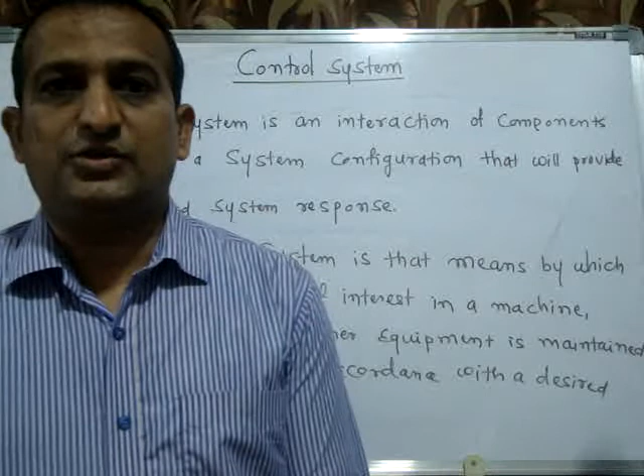First we'll see the definition of control system. A control system is an interaction of components forming a system configuration that will provide a desired system response. Here, the desired system response is nothing but output. So whenever a system gives as per our desired or controlled output, that is called a control system.

Some systems are there, you give some input, you will get that output, but it may not be a controlled or your desired output, then it is not a control system.

One more definition of control system: the control system is the means by which any quantity of interest in a machine, mechanism or other equipment is maintained or altered in accordance with the desired manner. Control system is not only controlling itself, sometimes it has to control other machines also.

A good example is a teacher. He has to control himself - he should be disciplined, go to class in time, prepare well, follow the timetable, and leave the class at the proper time. Parallelly, he has to control the class, control the students' discipline, check whether students are understanding or not, and maintain some specific speed - in 1 hour he has to cover some content. So the classroom with the teacher is also a good control system.

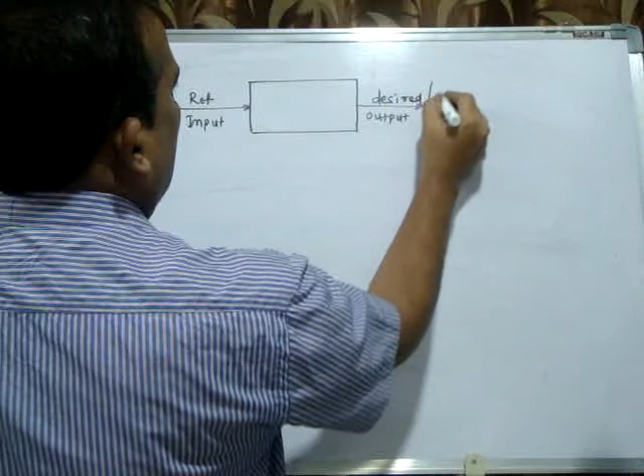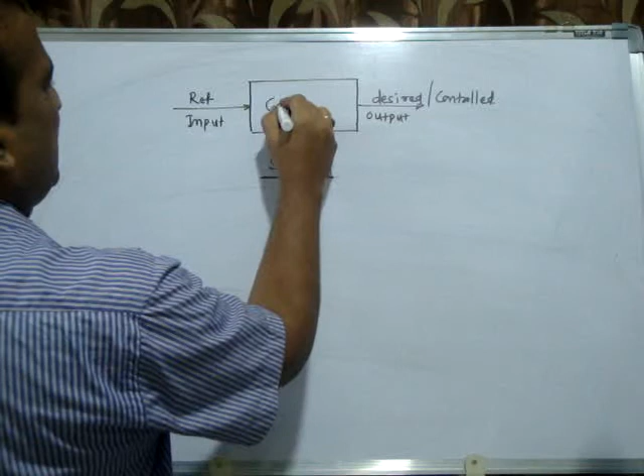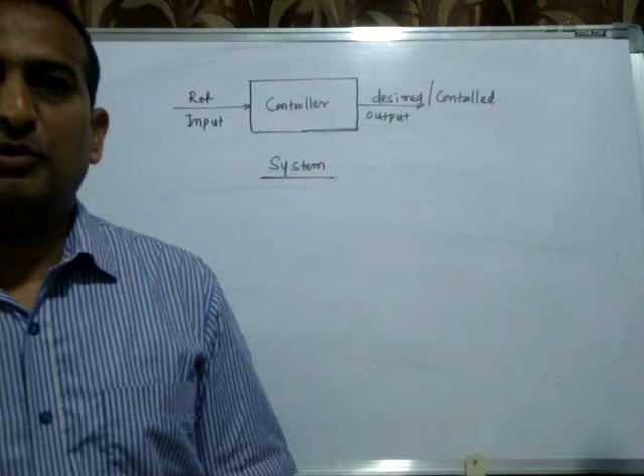Say for example this is a system. Here some controller, some controlling element is there. It may be a microcontroller, or it may be a microprocessor, it may be a PLC, or if it's a human body, then it may be the brain. So some controller is there - the controller is taking input and as well as it is giving the output.

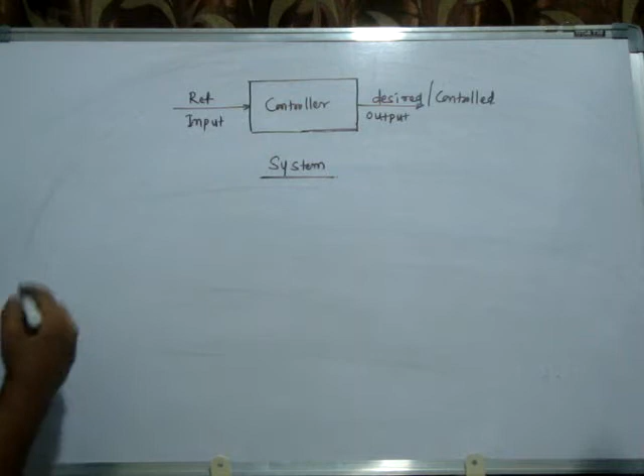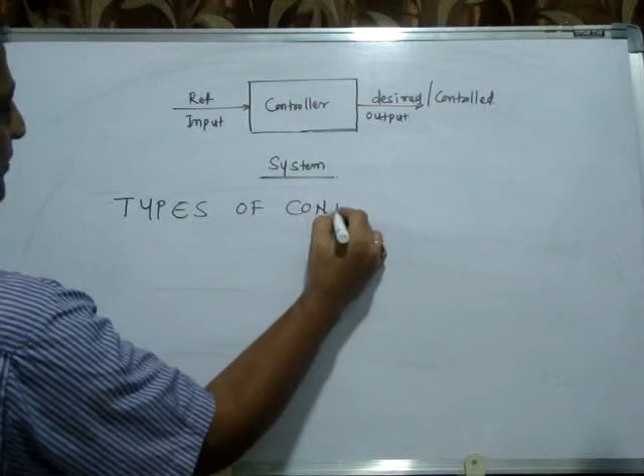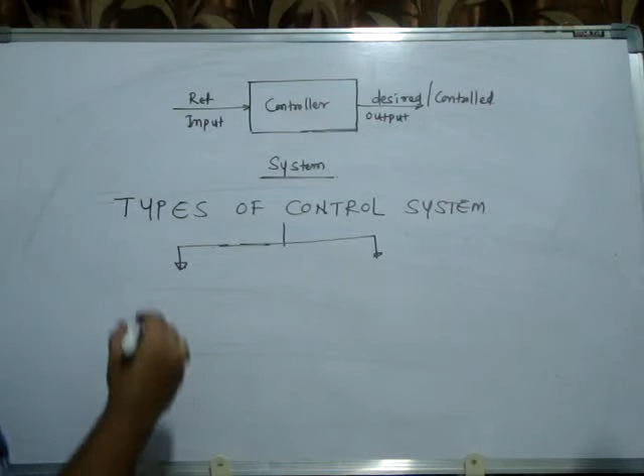Now I'll discuss the types of control system. Basically there are two types, though classifications differ across books. Basically there are two types of system: one is called open loop control system, and one more is called closed loop control system.

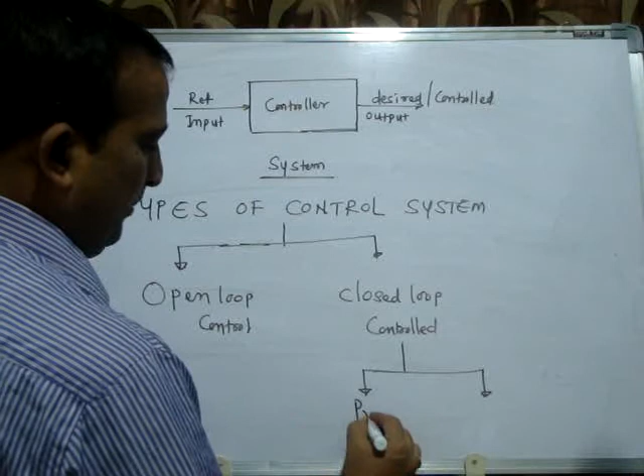If you refer to different books, there is a different classification, but basically it's open loop control system and closed loop control system. In a closed loop control system, I'll divide it into two: process control system, and one more is called servo control system.

We'll see the classification - man-made and adaptive control system, manual control, automatic controls. But the basic classification is open loop control system and closed loop control system. In a closed loop control system, process control and servo control. Let us see what is meant by open loop control system and closed loop control system, with some examples, and what is meant by process control and servo control system, with some examples.

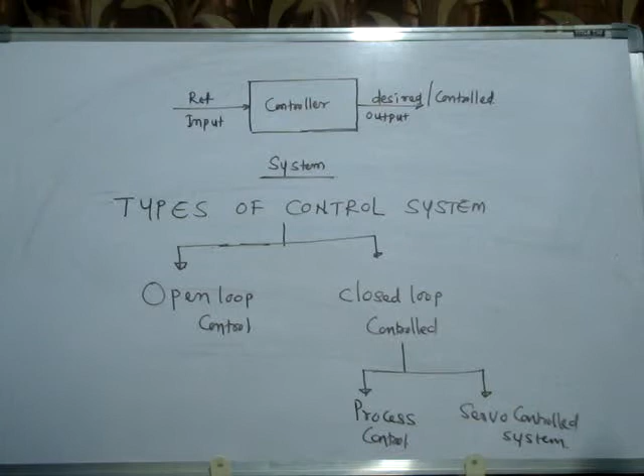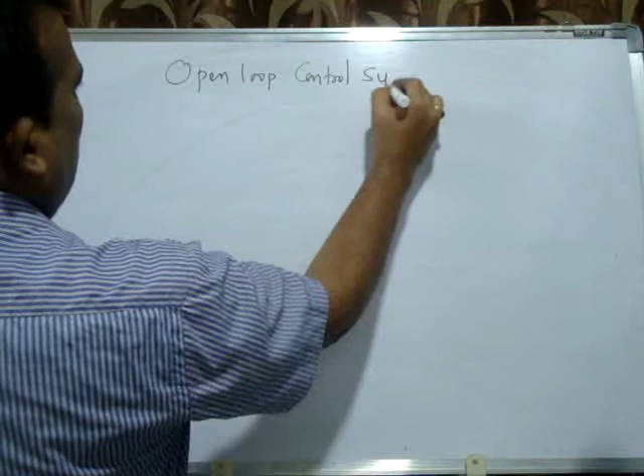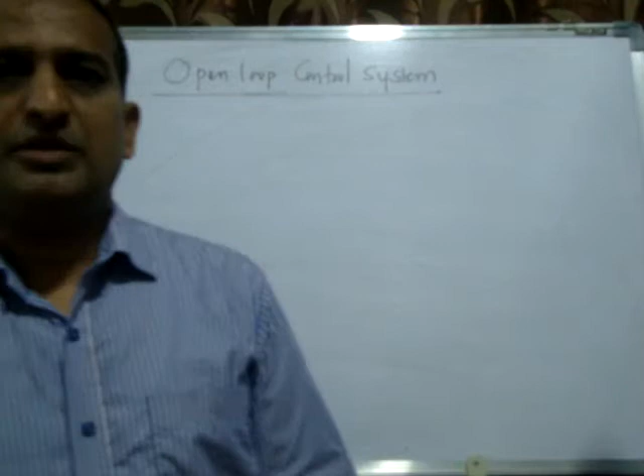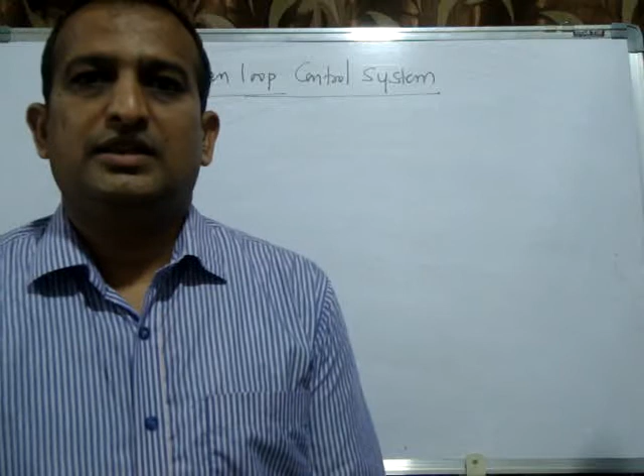First, we'll see the open loop control system. The good example for open loop control system is a washing machine. Many systems are open loop control systems. Even a teacher taking a class, not bothering about how many students are attentive, how many are writing notes, how many are understanding - he just teaches for 1 hour and shares the knowledge, but if he is not measuring how effective it is, then it is an open loop control system. In an open loop control system, the system is working fine and accurate, but we are not measuring the output.

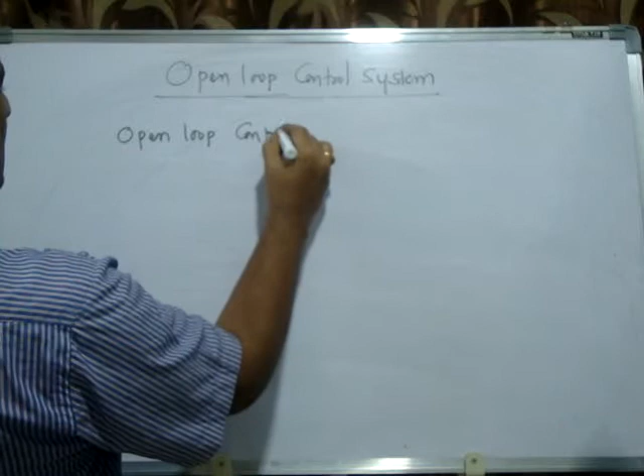So indirectly, how to define it? Open loop control systems are working on a time basis.

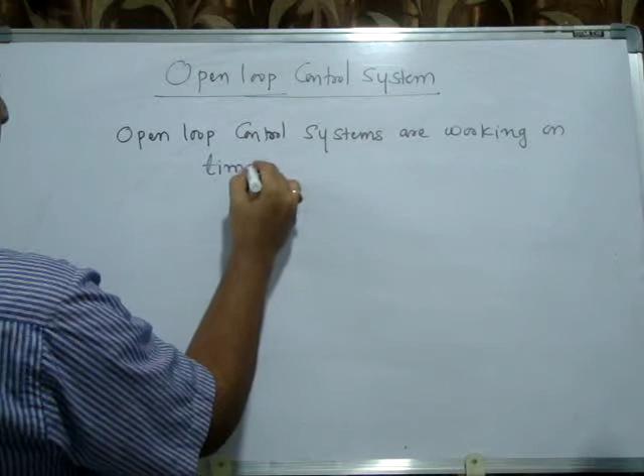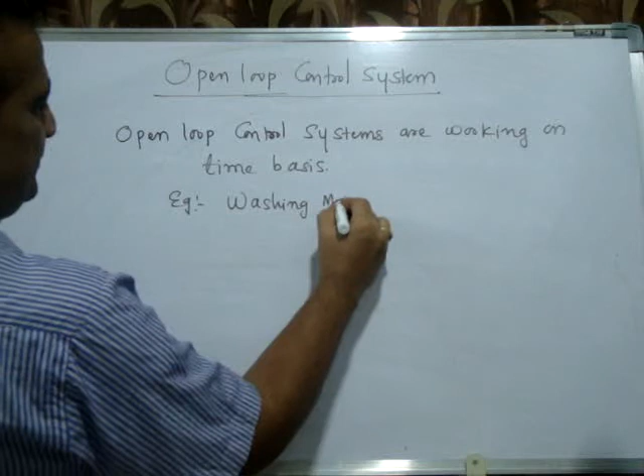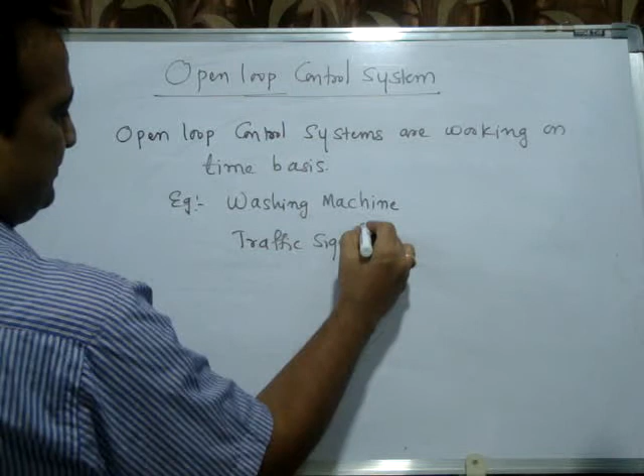You set the time, even the traffic control signal. A good example first is the washing machine, and the second one is what? Traffic signal. Many examples are there. Even you take a fan,

you just switch on the fan, it starts rotating, but at what RPM it is rotating, we are not measuring. Why is the washing machine called an open loop control system? Because the washing machine is not measuring the number of dust particles in the cloth. If you set 1 hour, it will work for 1 hour. If you set half an hour, it will work for half an hour.

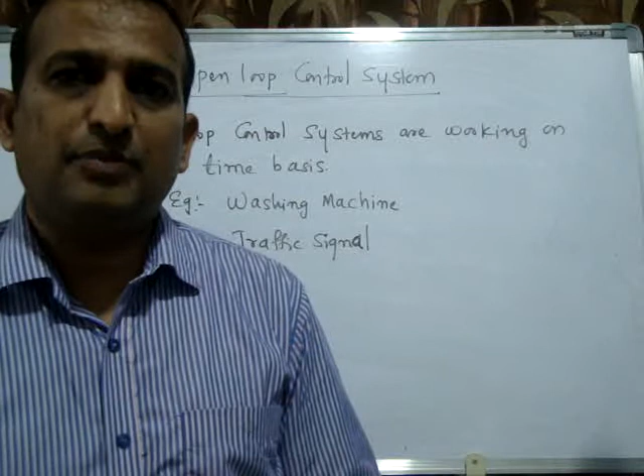But in America, and in India also, there are more advanced, costlier machines called fuzzy based washing machines. Up to a certain extent, as soon as you put in a cloth, it will measure and tell you this much washing powder is required, this much time is required. It measures the number of dust particles up to a certain extent. So that is called a closed loop control system.

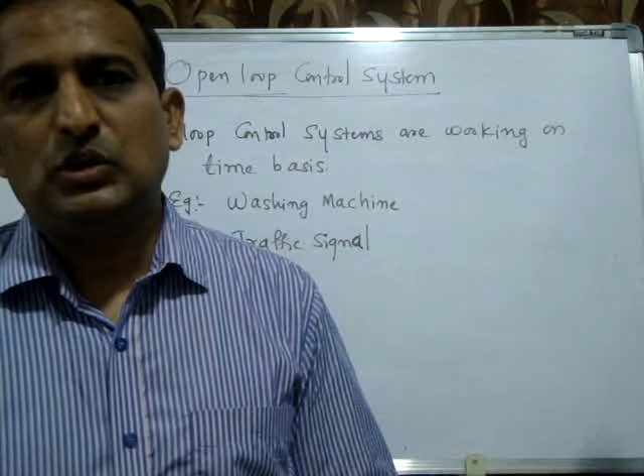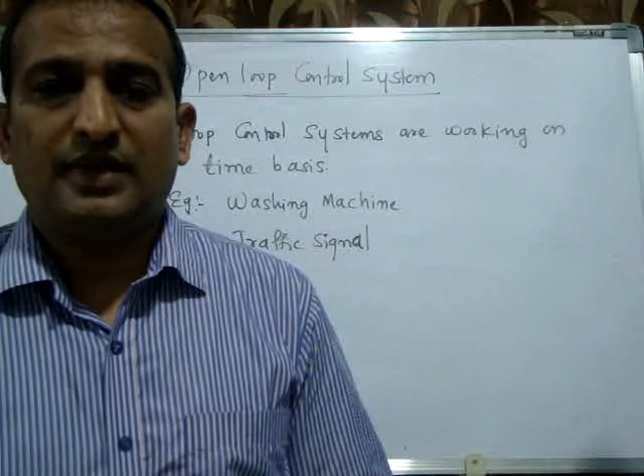But normally, whatever household machine we purchase, we set the time. Even if it is a new cloth, or the cloth is very dirty, we put 20 minutes, 40 minutes. You will get output, some cleanness, but not 100% cleanness. It is not called a desired or controlled output. Accuracy may be 90% or 80%.

In the traffic signal also, you set the time for the green light, red light and yellow light. Even if one side has no traffic, we still have to wait on the road. But in foreign and developed countries, they have put springs inside the road. They are called sensors, and these sensors measure the traffic density. As per density, they change the time automatically, not always constant.

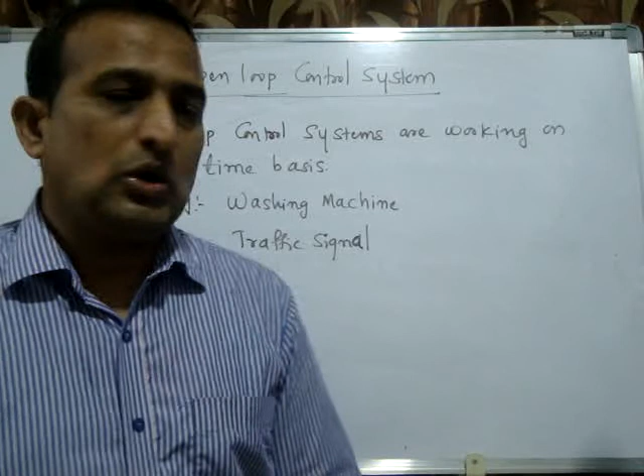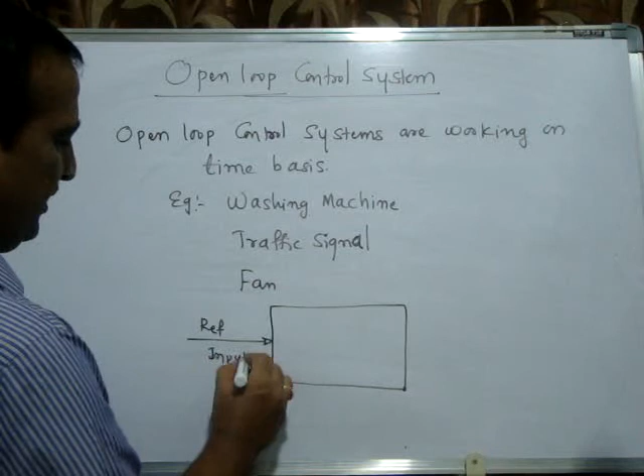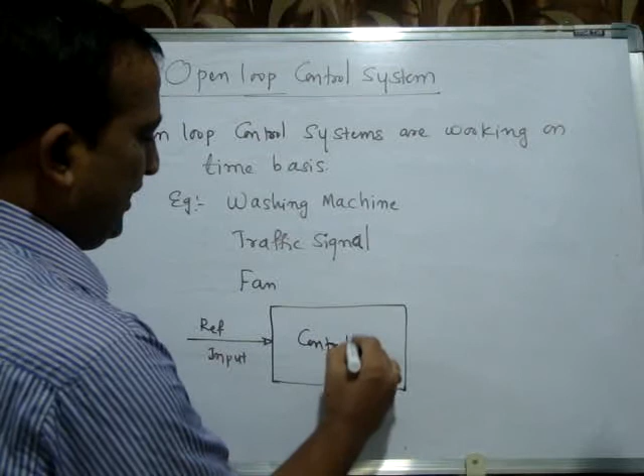So this is called an open loop control system. Here there is a reference input. Even for a fan, we'll put it at the first mark or second mark, or in the washing machine, we'll set the time. That is called reference input. And there is some controller. Already I have discussed the controller: microcontroller, PIC controller, PLC controller, and nowadays Arduino, Raspberry Pi. So many controllers are available.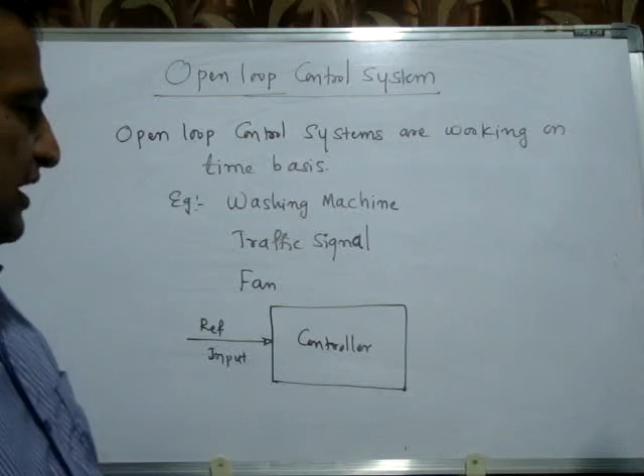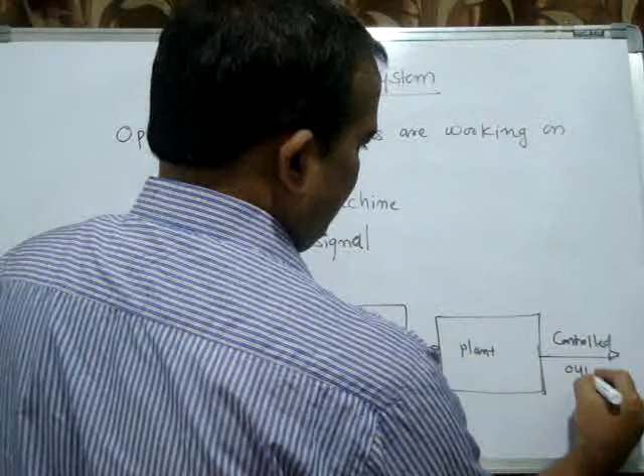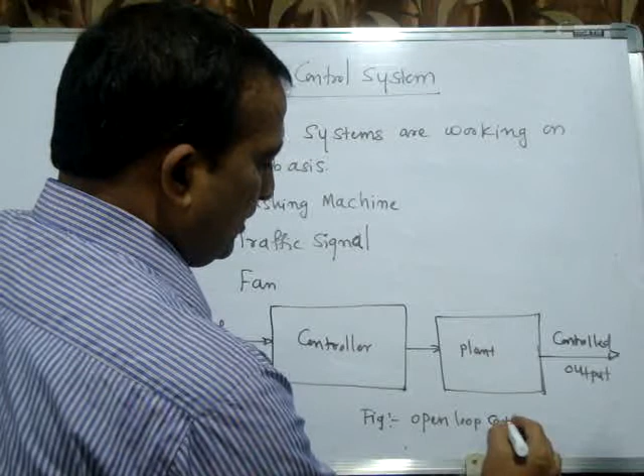From the controller, the plant is nothing but, in a washing machine, the space inside which the drum is rotating; that is called the plant, and after the plant you will get some controlled output. This is called an open loop controlled system. In this case, there is no feedback element. We are not measuring the output, whether the output is 100% right, 90% right, 80% right.

The main advantage of the open loop control system is the design complexity is very less and the cost is less. Some disadvantages: the accuracy is less, less reliable. One more advantage is the stability is very high. We'll discuss later. So this is the block diagram of the open loop control system. Now I have given some examples and the definition of open loop control system. Now I'll move to closed loop control system.

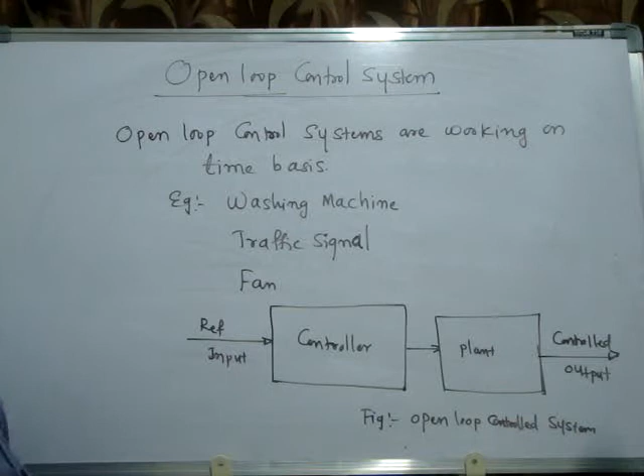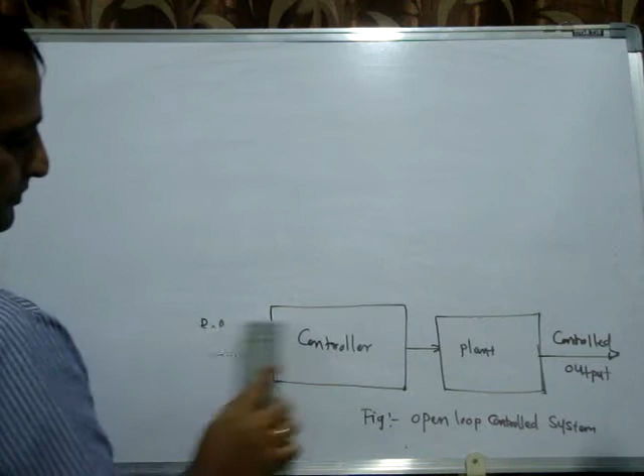The closed loop control system is a very interesting system. In a closed loop control system, we are continuously measuring the output and taking the feedback by using a feedback element. Then we compare it with the reference input. If there is any deviation, any error, then we modify the input to the plant so that the error reduces. So it is a more accurate system.

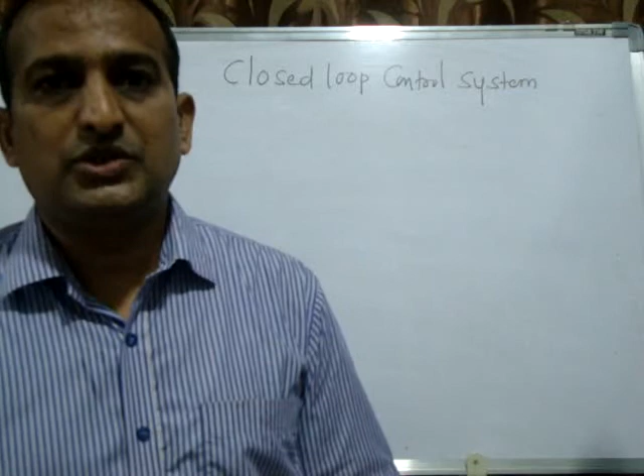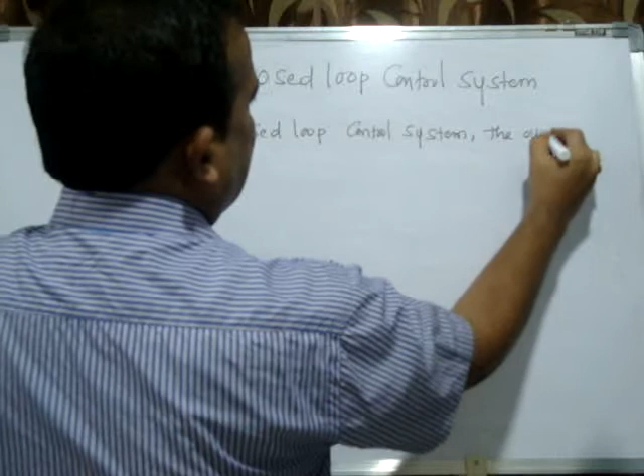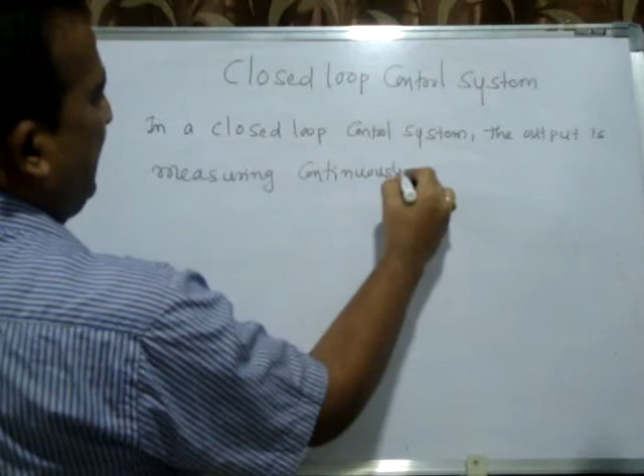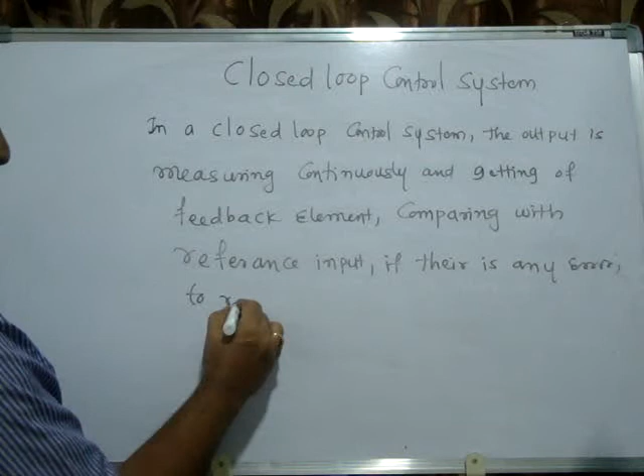Here I'll write a definition. In a closed loop control system, the output is measured continuously and obtained from the feedback element, compared with the reference input, and if there is any error, the controller acts to reduce the error.

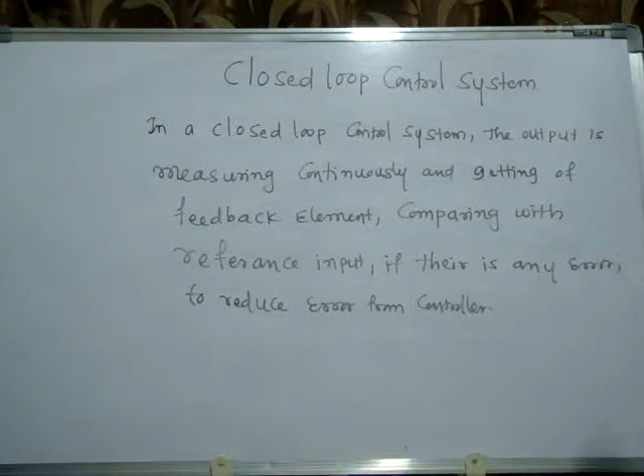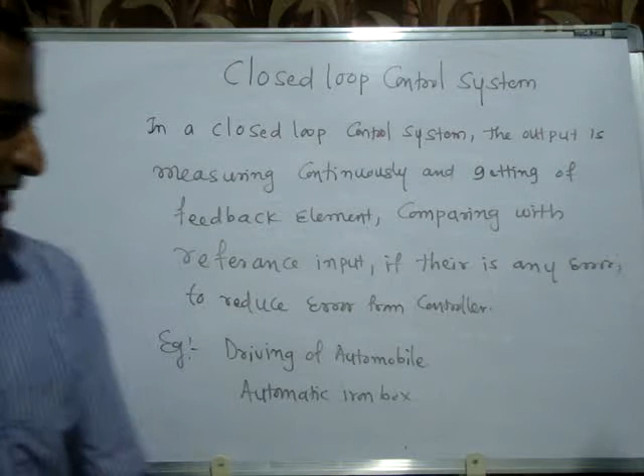A good example of a closed loop control system is driving an automobile. Many examples: automatic iron box, press box. Here you can even convert a fan: put a sensor in the fan. If nobody is there, it has to sense it and the fan should switch off. If somebody comes inside the room, the fan has to sense it and start automatically. That is also a closed loop control system.

Even while a teacher is teaching the class, he has to go around and check whether all the students are writing or not, attentive or not, understanding or not. He has to ask some questions to the students, maintain the discipline, maintain the in time and out time, and control the content also. Then it is called a closed loop control system. So we'll see the basic block diagram of the closed loop control system.

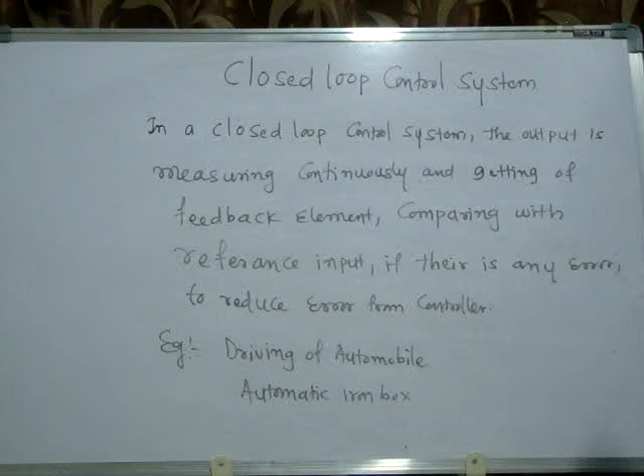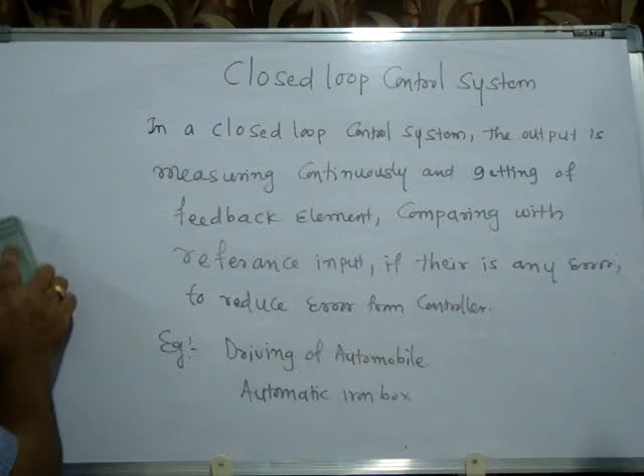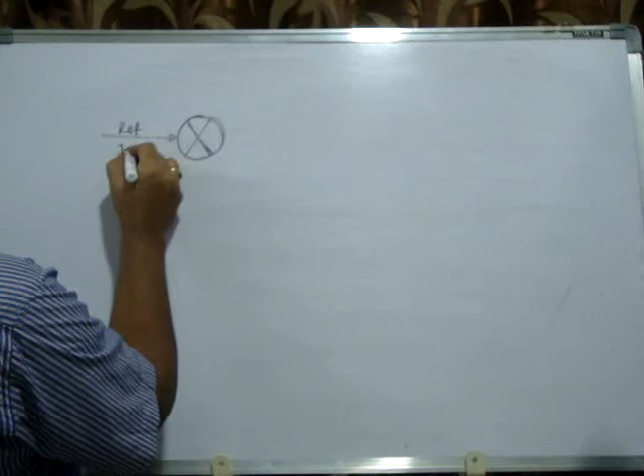Okay, now I'll start the block diagram of closed loop control system. Here, suppose it's a robot. I want to design a robot. Okay, so some reference input is required. You are telling the robot to move 1 mm, 2 mm, and then here you are selecting the controller. After the controller there is a plant. The plant is the end effector, manipulator.

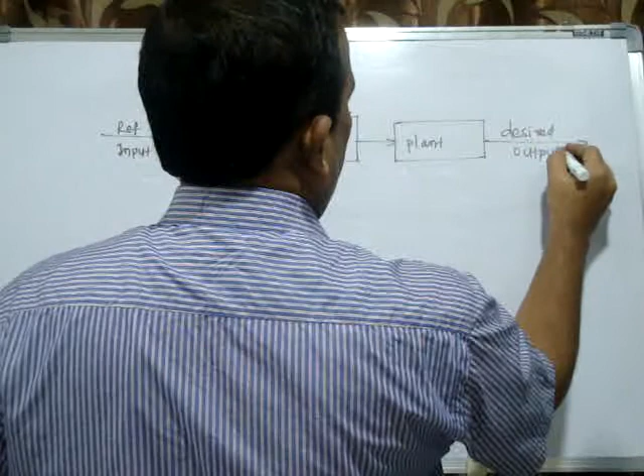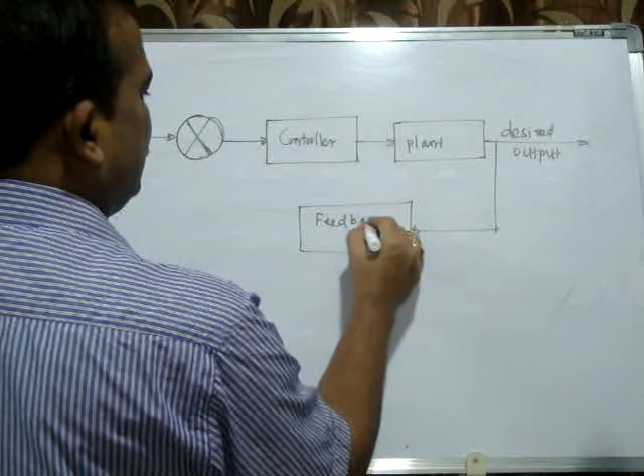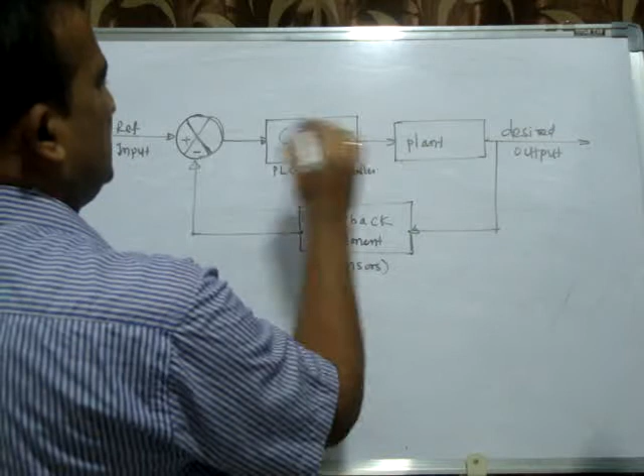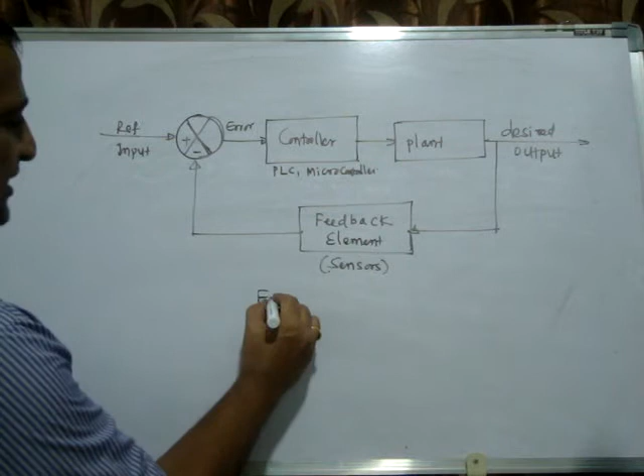So you will get the what? Desired output or controlled output. From the desired output, you are taking a feedback. This is called feedback. Here the plus and minus you can show inside or outside. This is called feedback element. So feedback elements are called sensors. Controllers may be PLC, microcontroller, many more. So in this case, I'll get an error, it may be positive error or negative error. This is called a basic block diagram of closed loop control system.

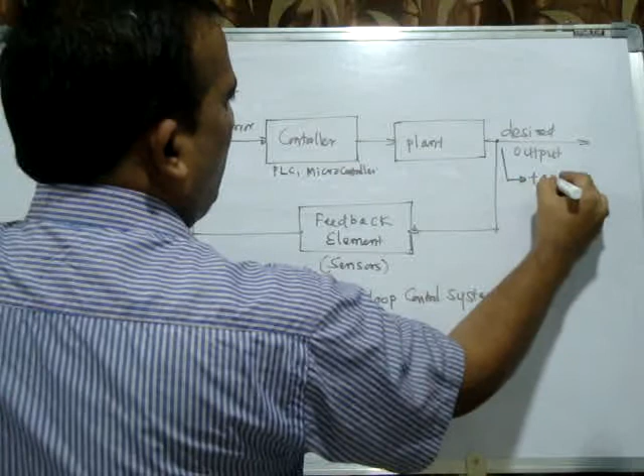Okay, here this is called what? Error detector or summing point, and this is called take-off point. So these are the terminology involved in the control system. The output is called the response, and the input is called excitation.

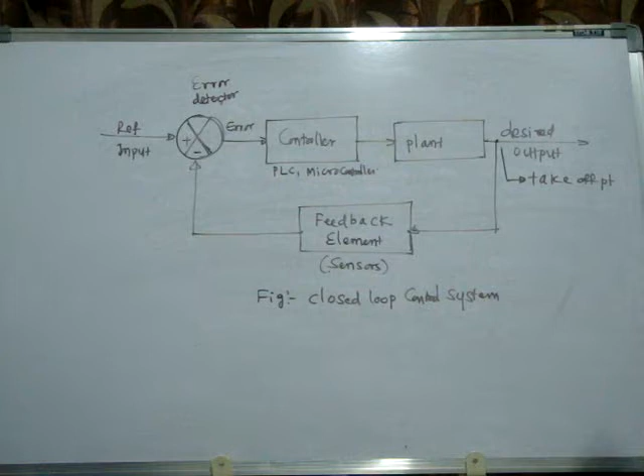Sensors, many varieties of sensors are available. It may be position sensors, velocity sensors, acceleration sensors, color sensors, level sensors, inclination and angle measuring sensors. Even in controllers also, SCADA, PLC, microcontroller, PIC controller, many more controllers are available. So now this is called a basic closed loop control system block diagram.

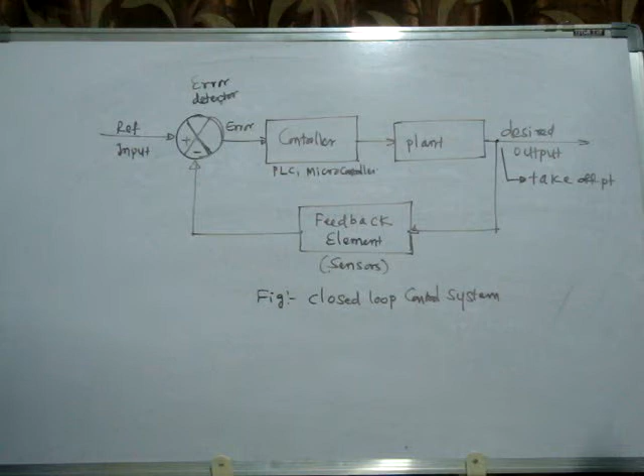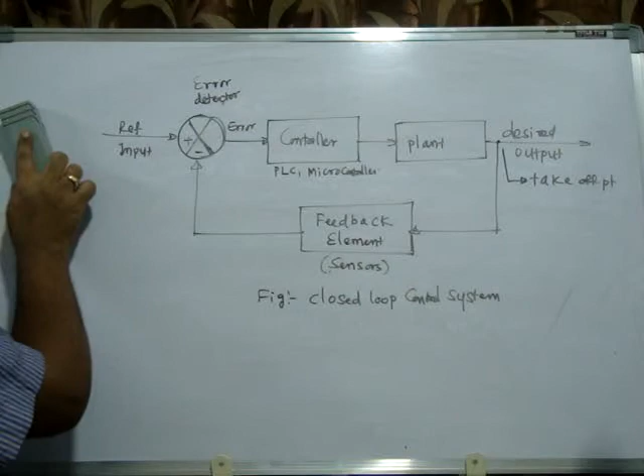Okay, now I'll take one typical example to understand the closed loop control system. The basic example is the driving of automobile, because anybody can understand this example. While driving a two-wheeler or four-wheeler, you are setting in your brain some speed, depending upon your time availability, your vehicle capacity, the road conditions, the rain and all. In the brain, you are setting some reference input. I want to ride a bike with a reference of, suppose, 80 kilometers per hour on the highway.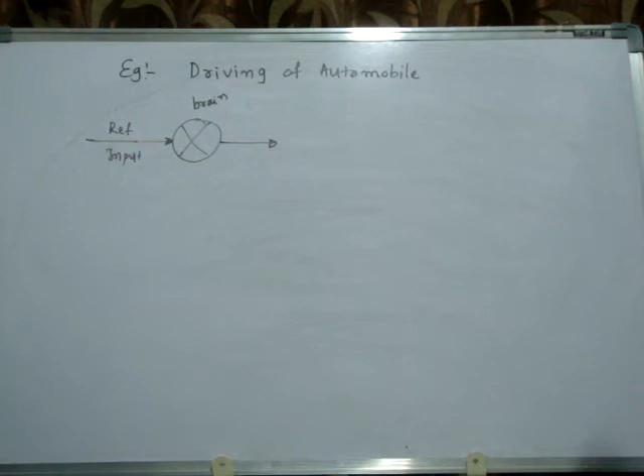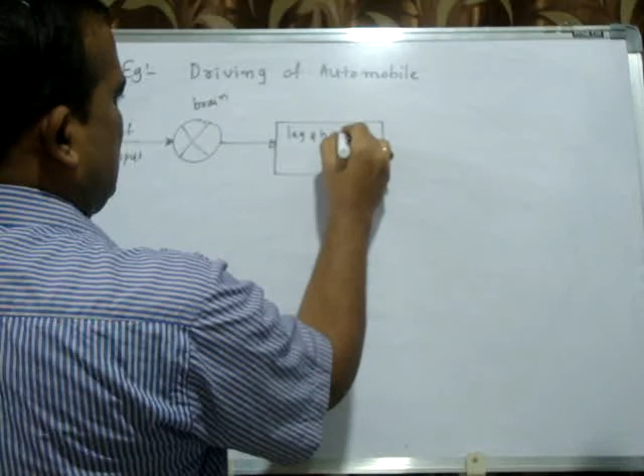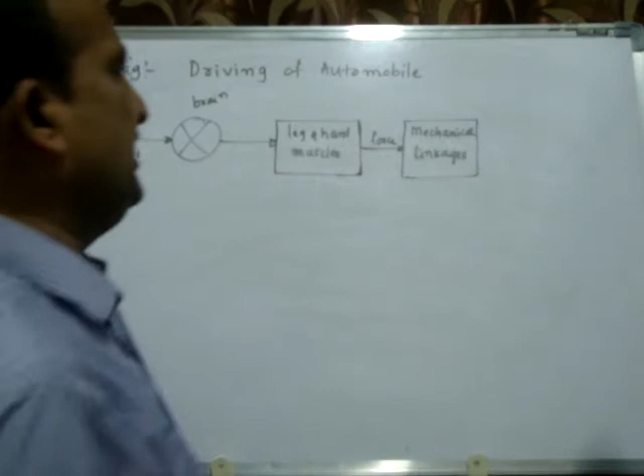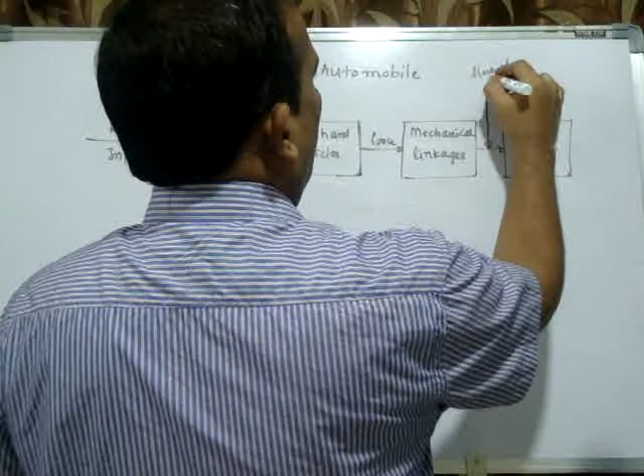Now that signal goes to where? Leg and hand muscles. The output of the leg and hand muscles is called what? Force. You are applying the force to the mechanical linkages. It may be accelerator, it may be clutch. Then from the mechanical linkages, in the engine, it controls the flow of fuel. Then the output is the speed. This is called controlled output.

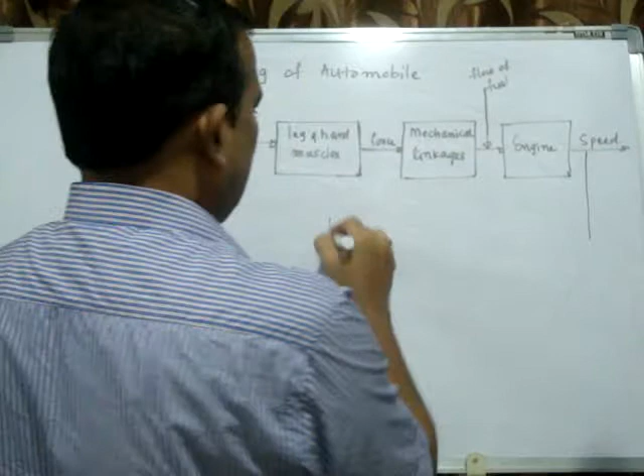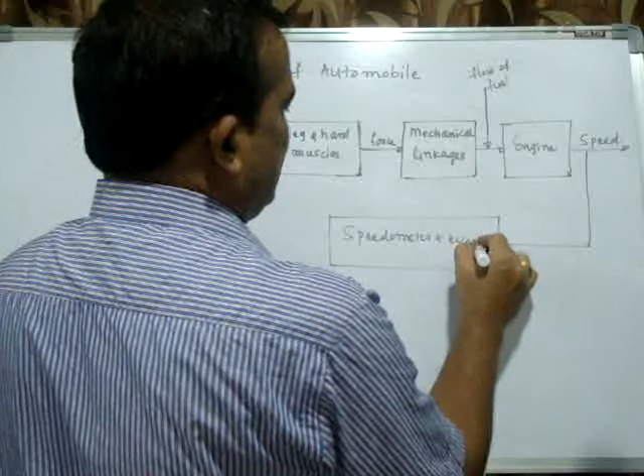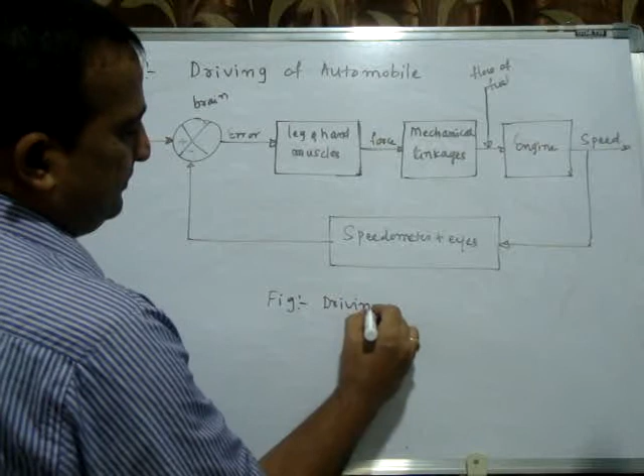From the output, you are seeing the speedometer with your eyes. Then you are comparing with your reference speed, and here there is an error. So I'll explain once again. This figure is called driving of automobile, and especially this is a closed loop control system.

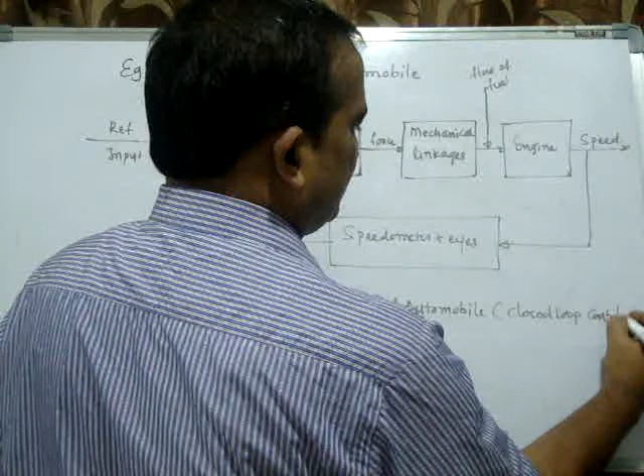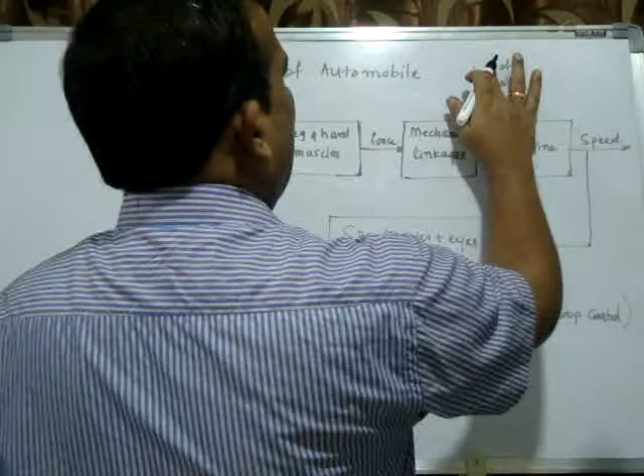Closed loop control. So in your mind you are setting 80 km per hour, so you are increasing the accelerator. You are applying the hand and leg muscles. If it's a two-wheeler, you are accelerating, and using the leg you are changing the gear, 1, 2, 3, 4. Then it goes to the mechanical linkage. From the mechanical linkage, in the carburetor, the rate of fuel increases, so more combustion, and I'll get more speed. That speed I can see with my eyes on the speedometer.

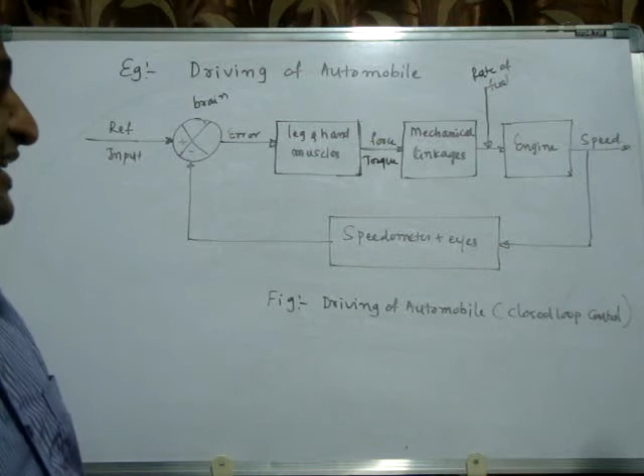Suppose it is showing 60, then the error is 80 minus 60, which is 20. When the error is 20, once again your brain sends a signal to your hand and leg to increase. You apply more force or torque. Then through the mechanical linkages, the rate of fuel increases, and once again more speed. Suppose it is 85; from my eyes I'll see the speedometer. The reference input is 80, so my error is minus 5. Then the brain sends the signal to the leg and hand muscles to decrease the force and torque, and automatically the fuel rate decreases.

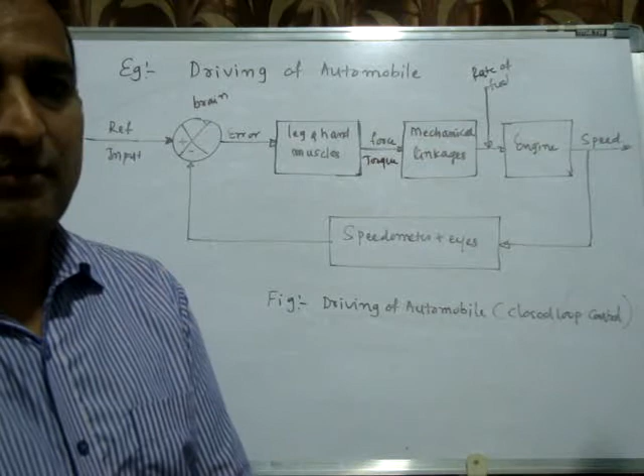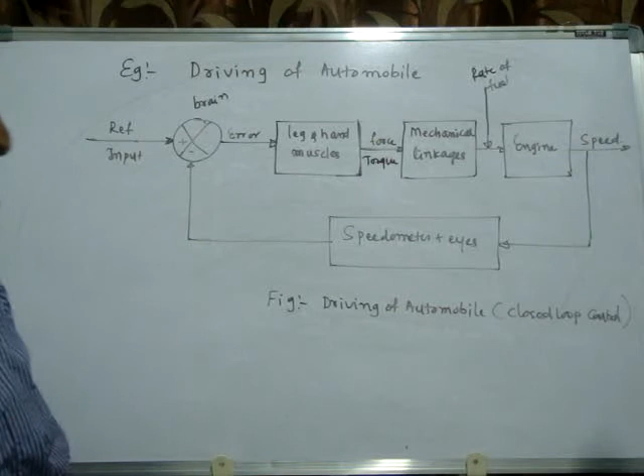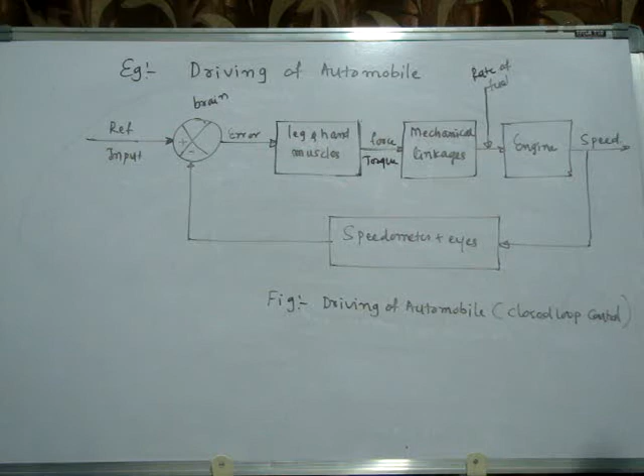You will get a speed. The speed may not be exactly 80, it may be 78, or between 75 and 85. Your reference is 80, and it will be very close to your reference input, but some time is required. There is a transient phase as well as a steady state phase; I'll explain later. So this is a very typical example, driving of automobile, for a closed loop control system. I hope you understood the closed loop control system. Here I can divide this.